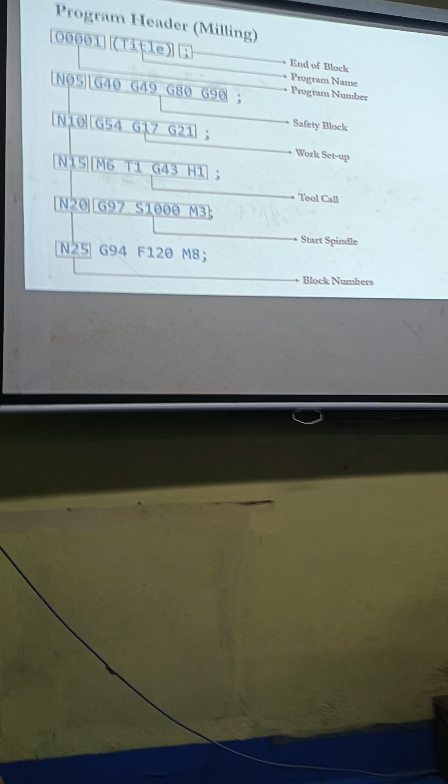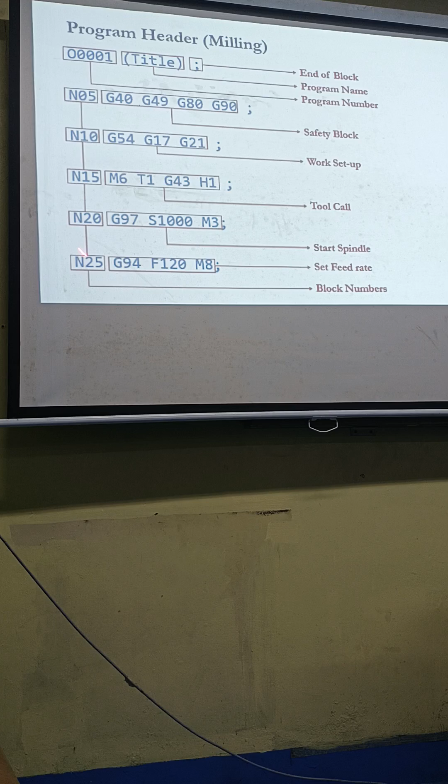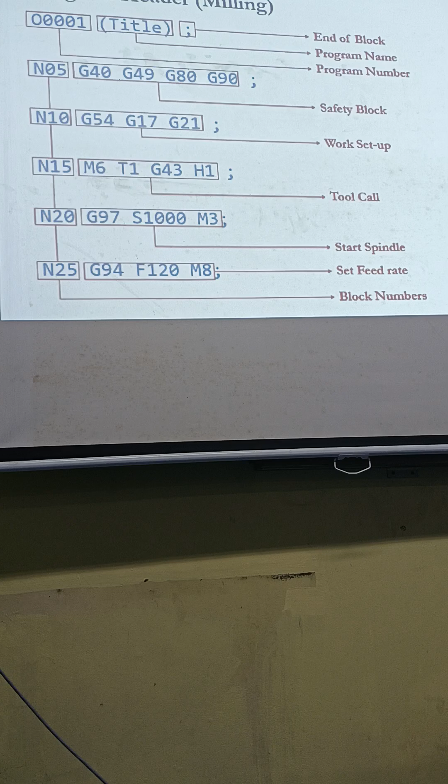Set feed rate. G94 is feed per minute. Ito, feed rate. Kumbaga, ito ang feed rate niya, in-specify na niya. 120 millimeters per minute. Okay, so sabi niya, in every minute, kailangan tatakbo ka ng 120 millimeters.

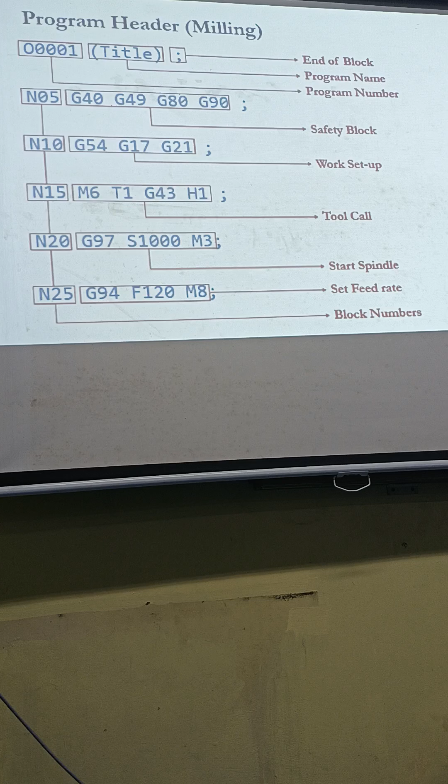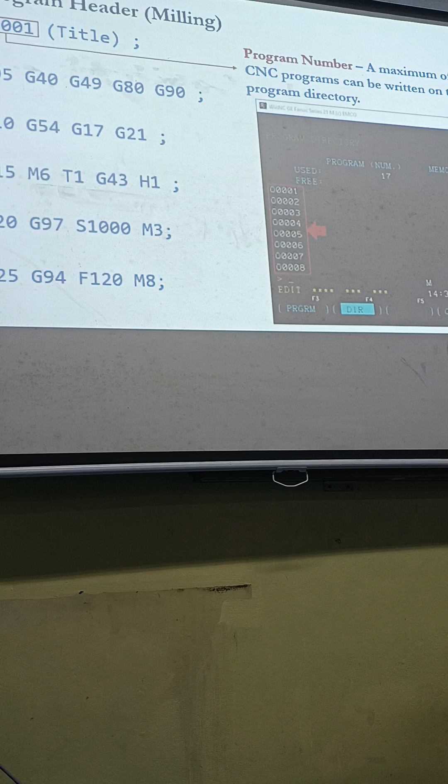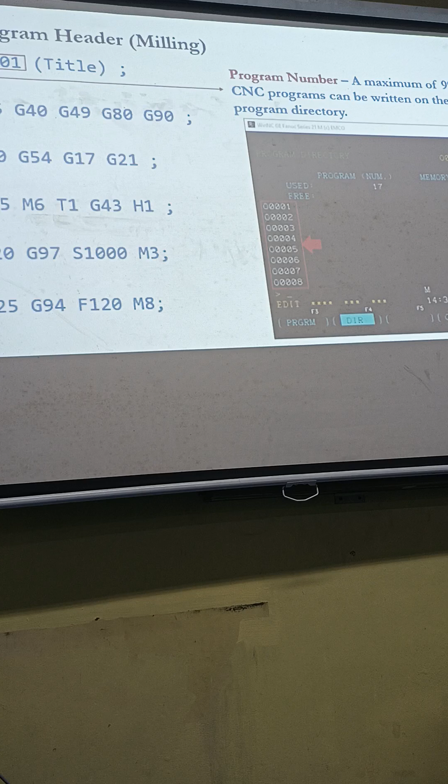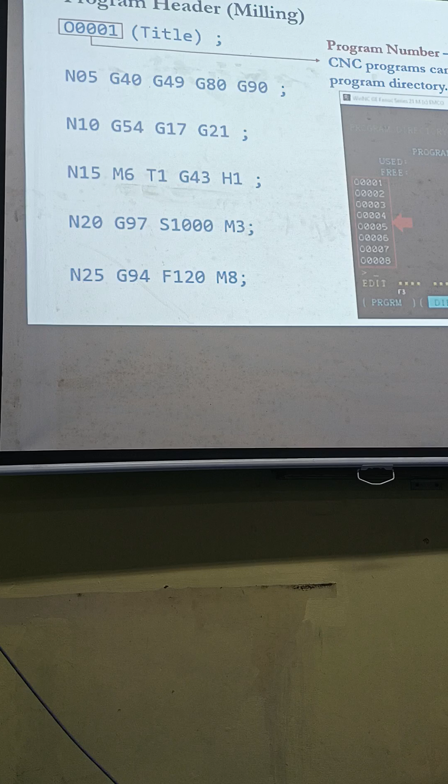And then, M8 actually is start coolant. So sa program number, a maximum of 999 CNC programs can be written on the directory. Ganyan siya karami. Okay?

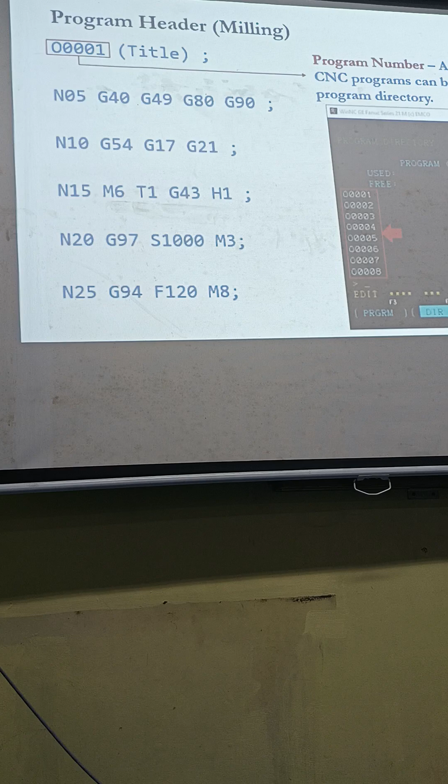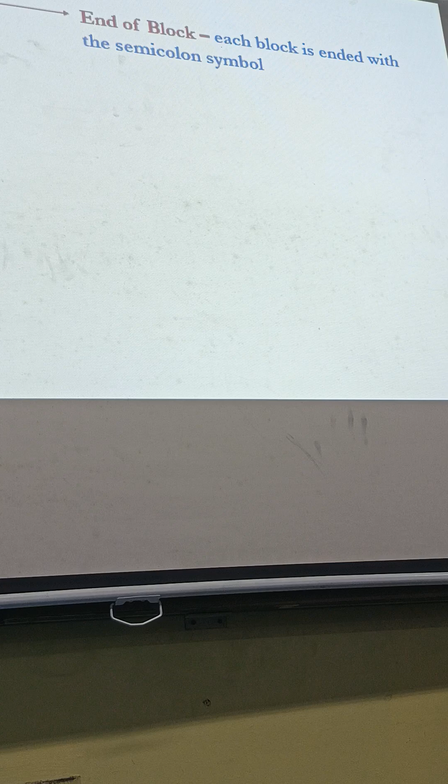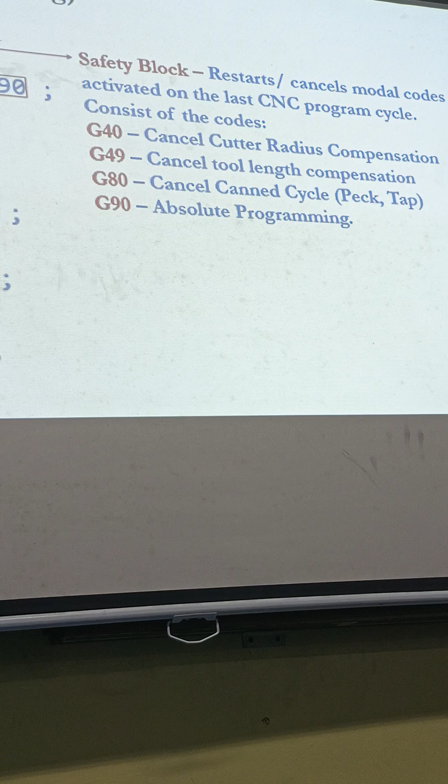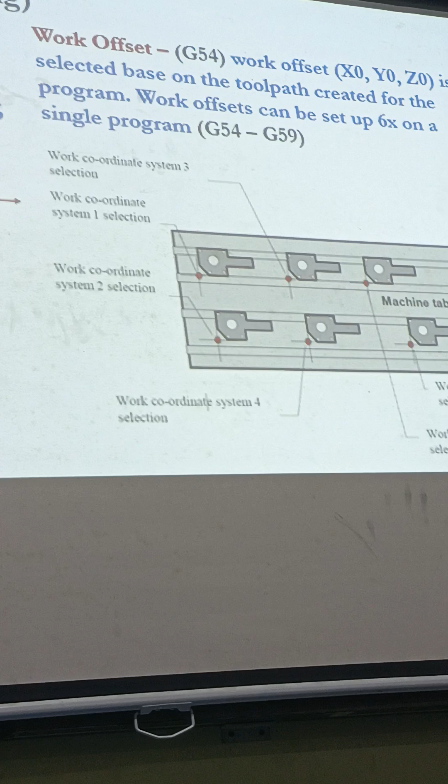Program name. The title is inserted in a CNC program with an open and closed parentheses. Kung bakit, in-explain ko na yan kanina. And the block. Each block is ended with a semicolon symbol. Block numbers, safety block. In-explain ko na rin yan kanina. For your reference, pwede learn kung gusto nyo. Then of course, work offset, as I have already explained.

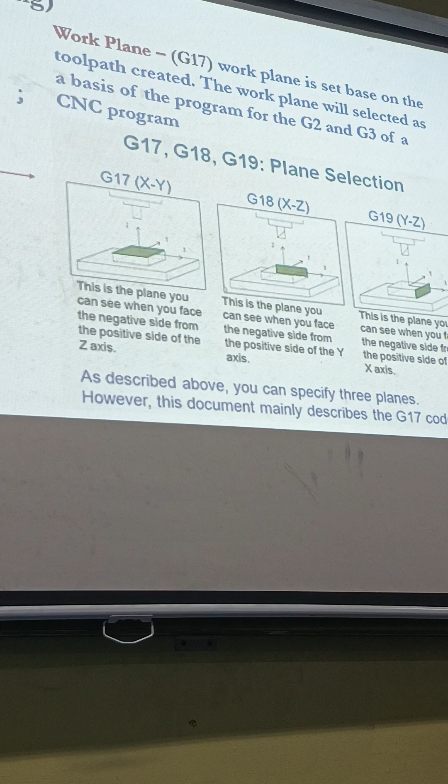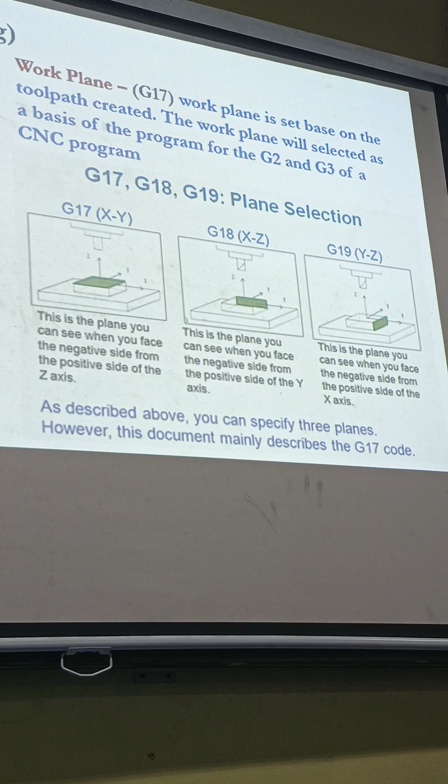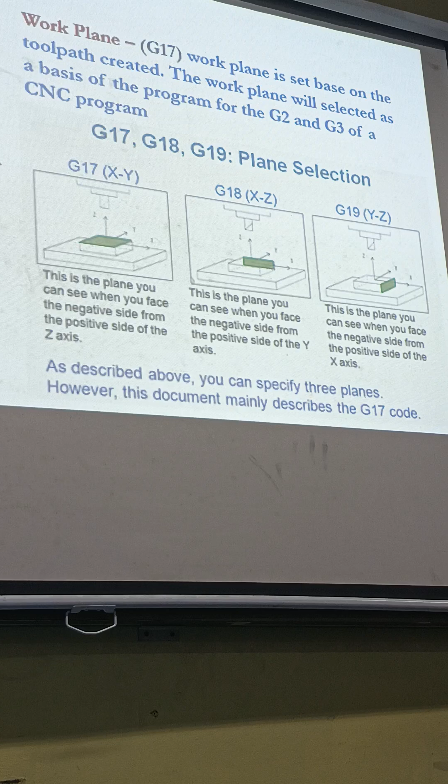That is the work plane, G17, which is the XY plane. G18 is XZ plane. G19 is YZ plane. So we call the XY plane kasi we are working on the X and Y coordinate. Tulad na ginawa nyo kanina. Program unit of measurement. Tool call.

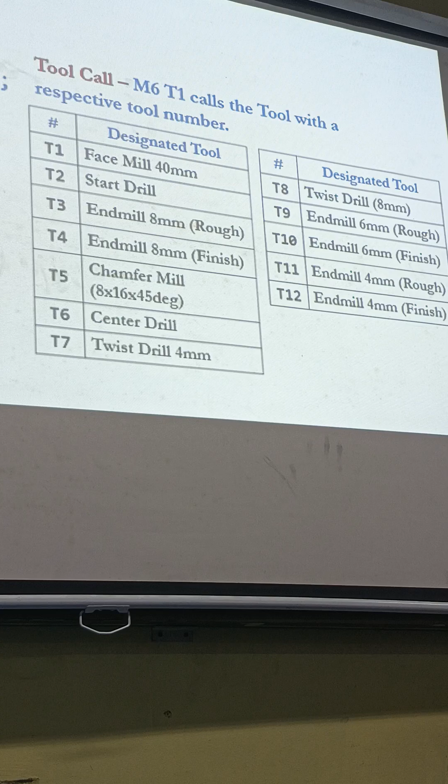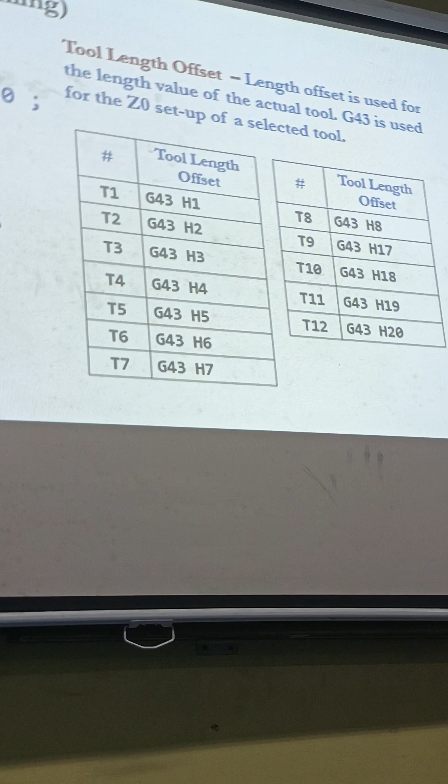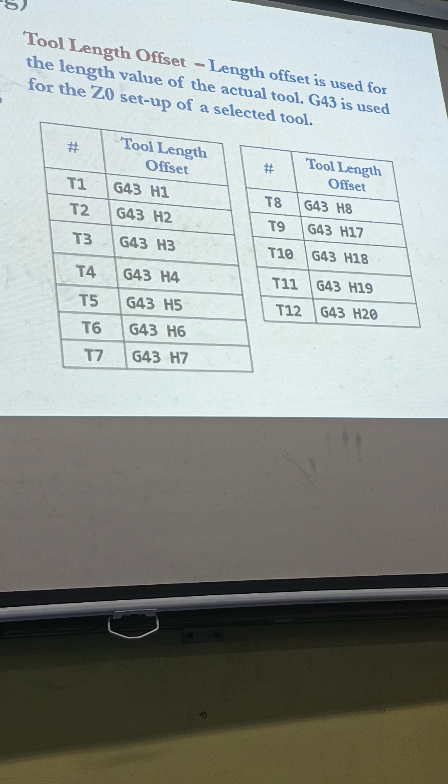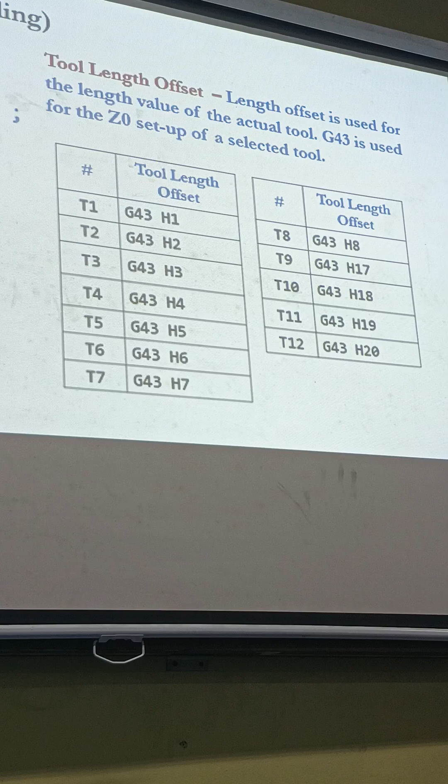Offset. G43. Pag may G43, may kasama yung H value. Kasi G43, tawagin natin ang tool offset. No? Kanina offset yung tatawagin natin. So, may partner lagi siya na H. Kasi yan ang specify kung aling tool ang kukunan na tool offset na gagamitin. Of course, yun na dito rin. Tulad. And then, of course, may computation yan.

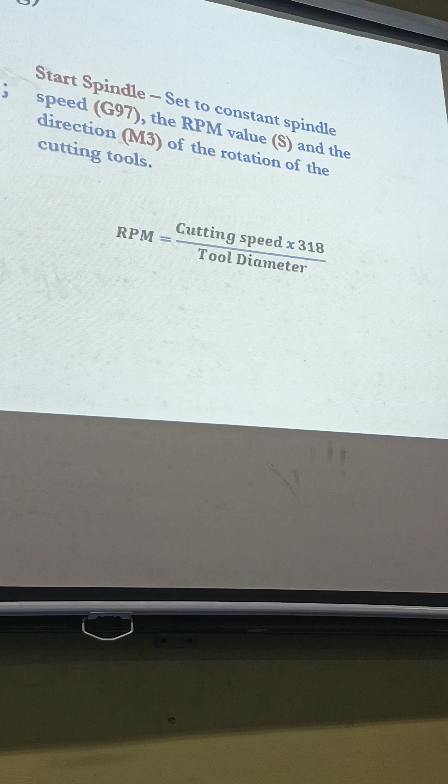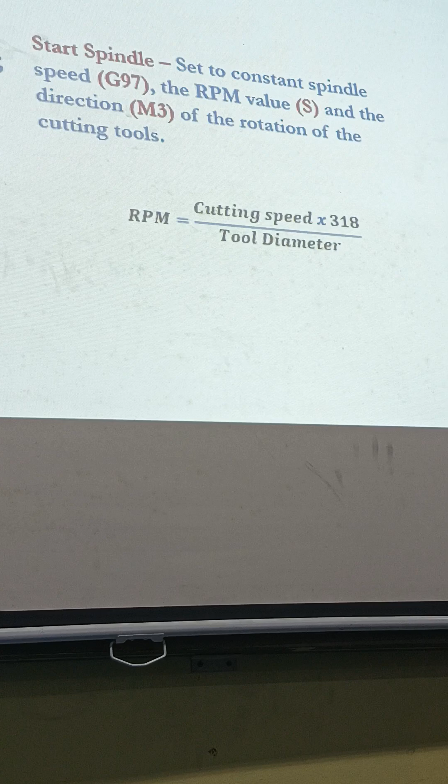Ito ang S1000. Nakakompute dito sa machine, di ba? Nakakompute dito sa machine. Cutting speed, RPM is makukuha mo by multiplying cutting speed with 318 divided by the diameter.

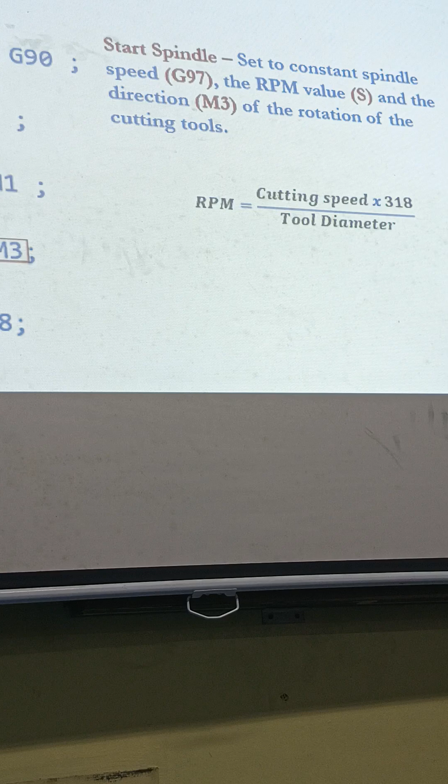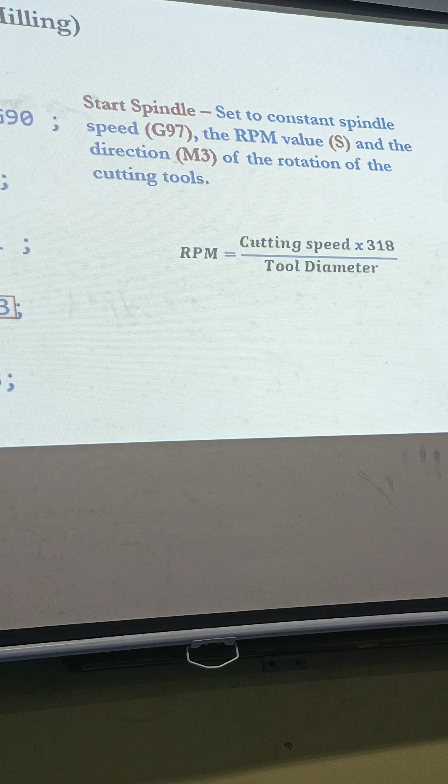Ang cutting speed is, hindi mo naman kailangan memorize yan. Kasi chart yan eh. Na magkakaiba ang cutting speed ng tool steel, iba ang cutting speed for aluminum, iba ang cutting speed for titanium. Saka pag nag-iba rin ang tool material is may recommendation din ng manufacturer. So, kailangan mong malaman na mo ngayon. Okay? But we use this computation or formula given all the conditions are good.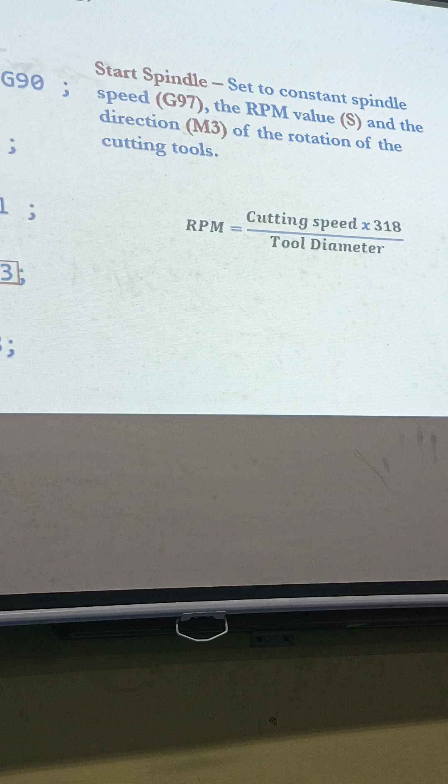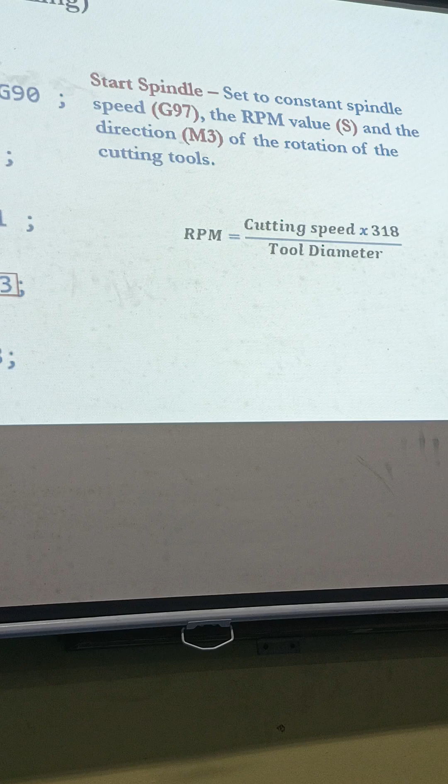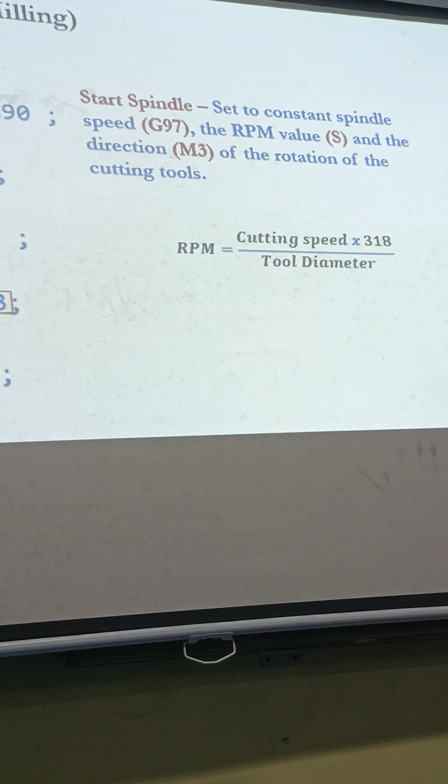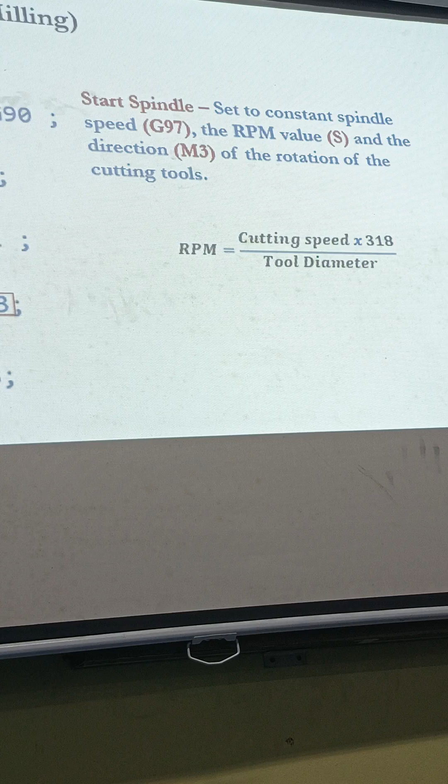Bago si tool, bago si makina, bago si cutter, maganda condition yung makina, wala siyang vibration. So, sa mga programmer, siyempre, perfect condition ang pinagbabasihan ng mga yan. But then, if you are in the industry, at alam mo yung makina mo, nag-a-adjust ka pa rin. Ay, bawasan ko ito, konti. Then, ito paglakasan ka eh, parang ganun. So, nasa discretion na natin na program. But basically, this is the formula, yung computing the RPM na gagamitin mo. Okay?

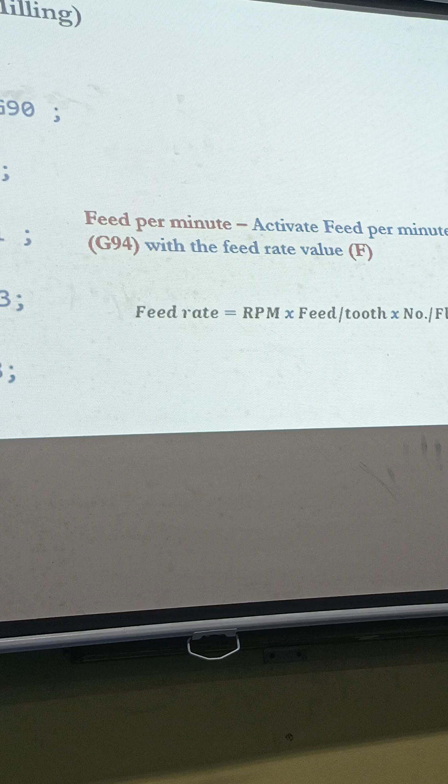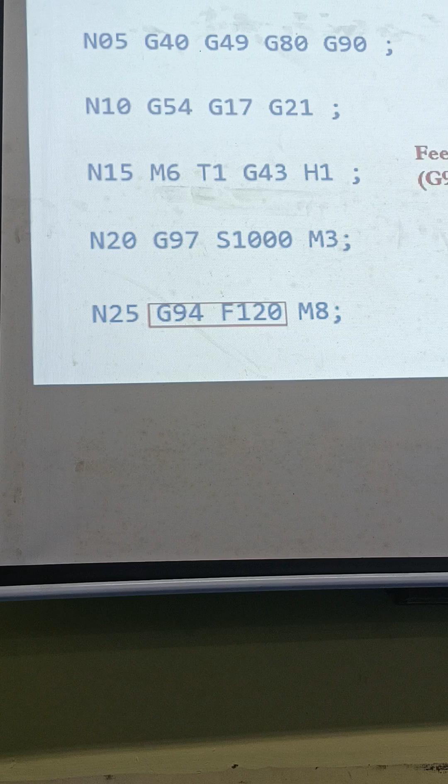And this is the feed per minute. Ang feed rate, meron din siya computation. Which is feed rate. Ito dito, ang sinabi niya is feed rate niya is 120 millimeters per minute. Now, to get the feed rate, you have to get the RPM. Kwenta mo lang RPM nila dito, di ba? RPM times feed per tooth.